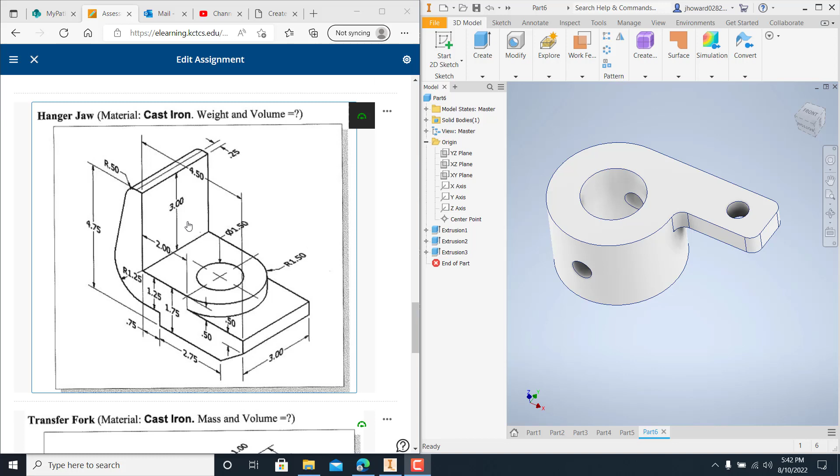Let's get in here and start drawing this one. I'll do File, New, Inches, so it's standard IPT. I'm just going to draw the profile of this thing out first and then go from there, because we're trying to make it as efficient as we can.

Hit my XY plane on the side here. We'll take off 2.75. Enter. Back that up. And now we're going to—looks like there's an angle there, aren't there?

So what we've got to figure is a couple things, and we'll come back to that. Sometimes it's easier to just go over here and go right up it. This height there is 1.75 minus 1.25, which is 0.5. Do y'all see that? So that step is 0.5 up.

I'm just going to put a line over this way, a little ways, because I don't know for sure how that meets up. But what I do know, by looking at it, is there's a line coming straight across here, and it comes down, and then it goes over, and then it ties back into this one. So I'm just roughing that in, and then I'll go ahead and put my dimensions in.

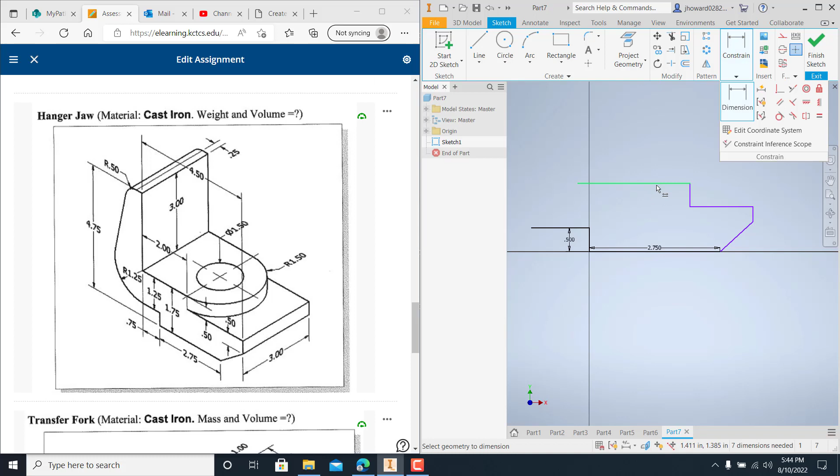Let's see here, there's a little extra that I missed. It comes down a little ways and then ties in. And this is 1.75 all the way to the top.

This little guy right here is a dimension of 0.5. So far, so good. This right here should be 0.5 as well, so it kind of gets everything lined up. This angle should be perfectly right because I fixed all of this.

Now there's a few other little things we've got to figure. So I'm just going to go ahead and put some more stuff in here. I really need to bring that line over, and I'm just going to bring this one straight up for the time being, and extend this one over to that.

So I really don't know a whole lot. Looking at the dimensions, I'm picking up some stuff along the way. 4.75, we know that. And if we come up here to the top, we're coming over—oh, I just seen it, 4.5. I didn't see that before. So that's a good spot to fix it.

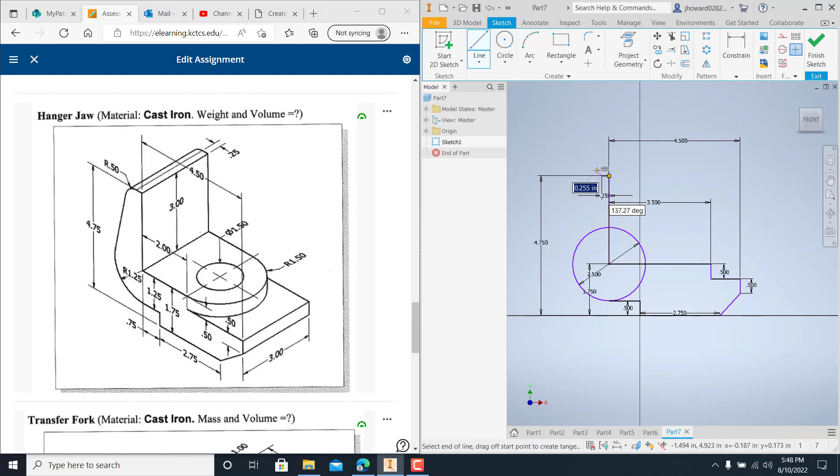So, line, come back 1/4 inch, and it's showing that there's a radius of 0.5, and what I'm guesstimating here, and it looks like it, is I need to come down 0.5. The reason I did that is I need to put a radius of 0.5, so I can come in here and hit this up to there, which is a 1/2 inch radius.

Now I can hit line and hover around this, but it's not letting me hit my tangent there. If I go up here to constraint and hit tangent—well, I'm just going to take a line, come up here, and you all see that there, I'm hitting that tangent again. All I have to do on this next one is hit constraint, tangent, catch this one, and that line will pull over, and I'll trim it all up. That looks a little bit better, doesn't it?

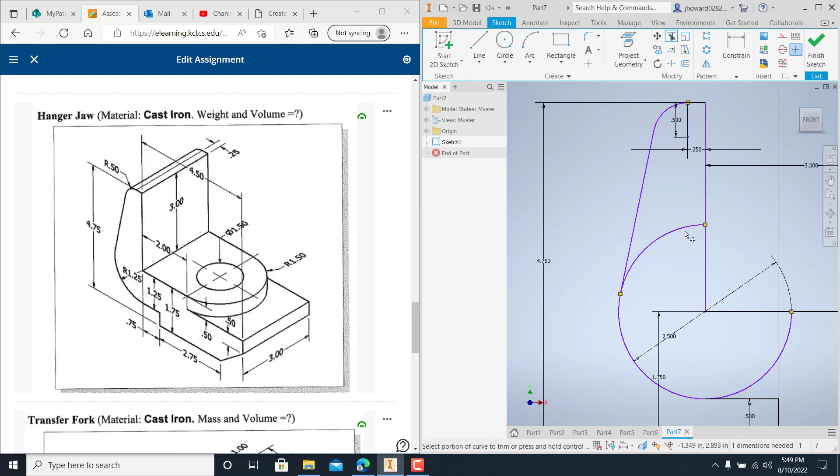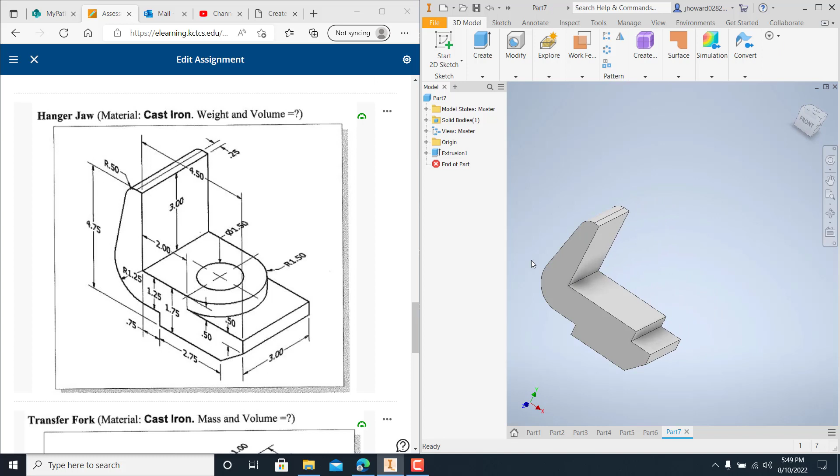So now I can finish my sketch. I can extrude it 3 inches. Okay, so got quite a bit of work done there, didn't I? Just off one sketch, just laying out the profile of this.

Another little tool here, a modify tool, would be this fillet tool. We've done it before. Put your radius of 1.5 in, catch that, and you can get that put in there just like that.

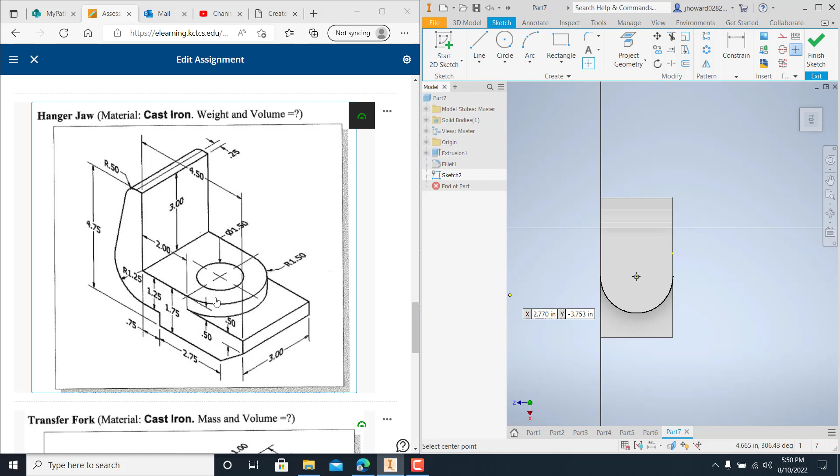So 2 steps, we're at that point. Third step, we haven't used it in a while, we're going to do it now. Let's use a point—it should be right in the center of that arc, the center point. It all should be in there concentrically. So let's finish that sketch out.

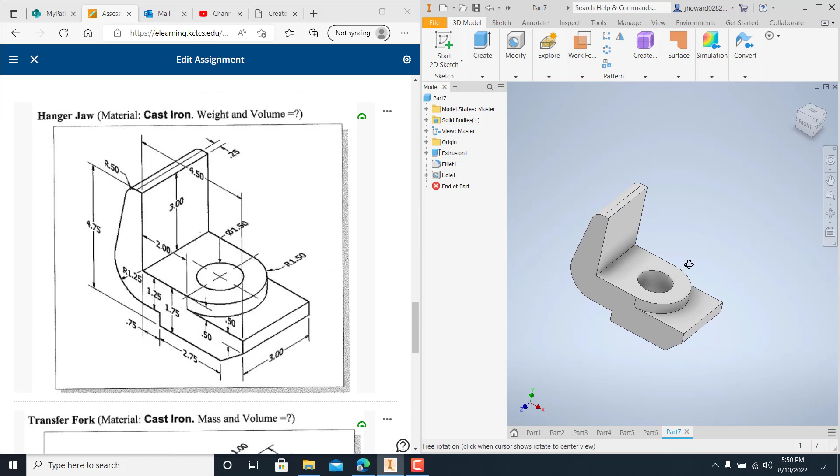Use your hole command, and it is a through hole because it doesn't give you a depth on it, of 1.5. Through all. Okay, so there's your part. A little tricky one, no doubt, but that's what it would look like.

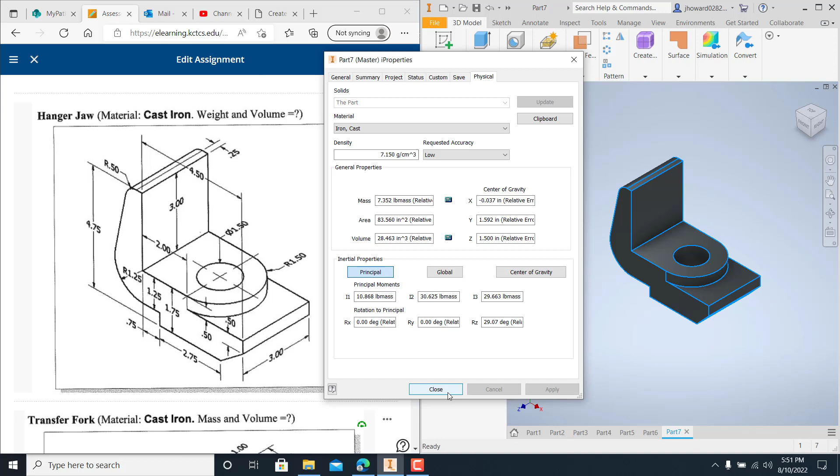And when you go to do its properties, right click on it, go to iProperties, physical, and this one's cast iron, so we've got to find the cast iron—this is iron cast. Apply, and then get all your information off of it. You can just give me the mass and the volume of it. We'll be fine. If you need any help with this one, just let me know.